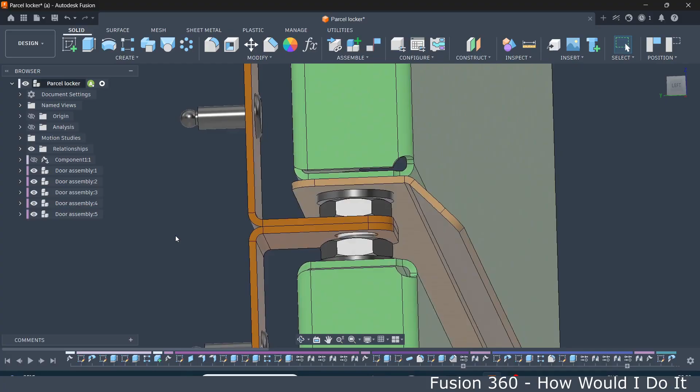In this video, we're going to look at how to quickly and easily insert fasteners into the assembly we created previously.

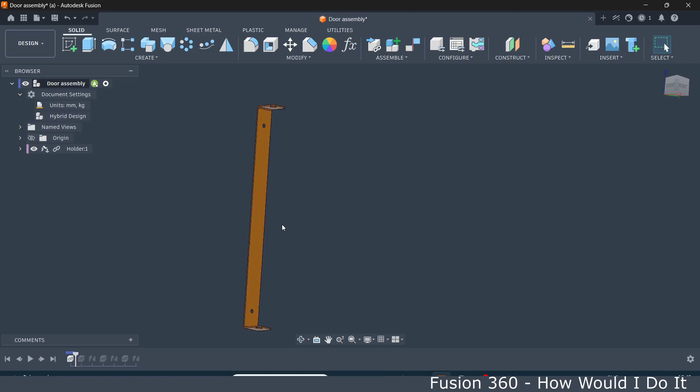Let's roll back the timeline to our first component, the holder, to add the first batch of hardware. We go to Insert, select Insert Fastener, and we'll start with rivets. I'm going to search for DIN 7337 since that's the standard for these rivets. Instead of DIN 7337, we can search only by number.

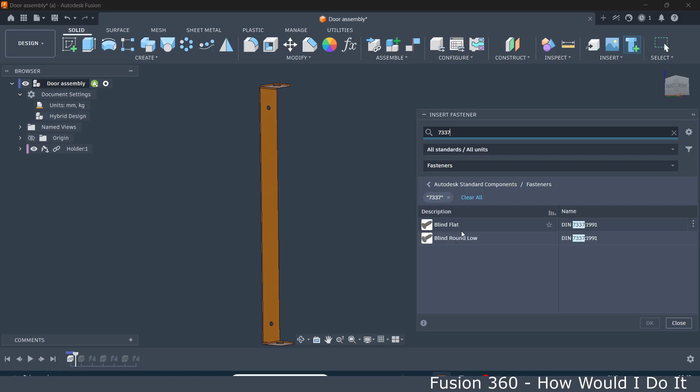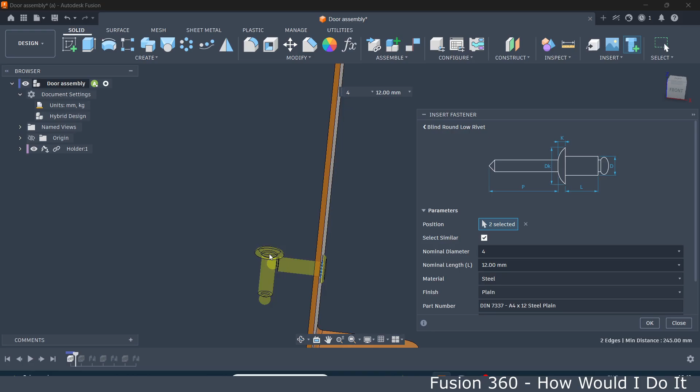We can type 7337. Now I know the hole diameter is 5 millimeters, so I'll select a 4 millimeter rivet. The length is already suggested, but I'll change it to 12 millimeters. As you can see, Fusion automatically populates both holes, which drastically speeds up the process, especially if you have more holes. Next, let's add some hex socket set screws.

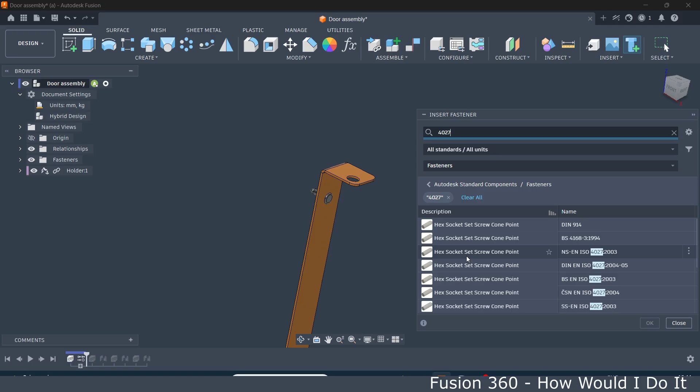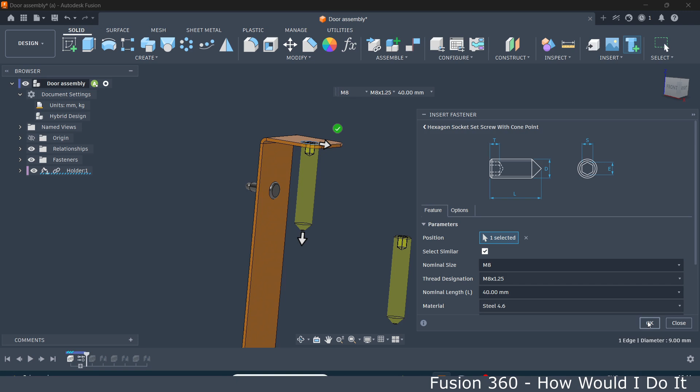Go to Insert, Insert Fastener, search for 4027 standard, and we will select M8. Once we pick the corresponding hole, it defaults to a 40 millimeter length, which works perfectly for us. We just need to tweak the position slightly. Let's move it upwards, and now it looks exactly right. Now we will add some thin hex nuts.

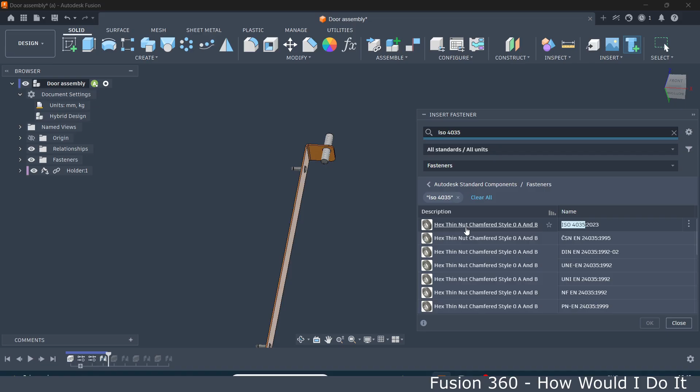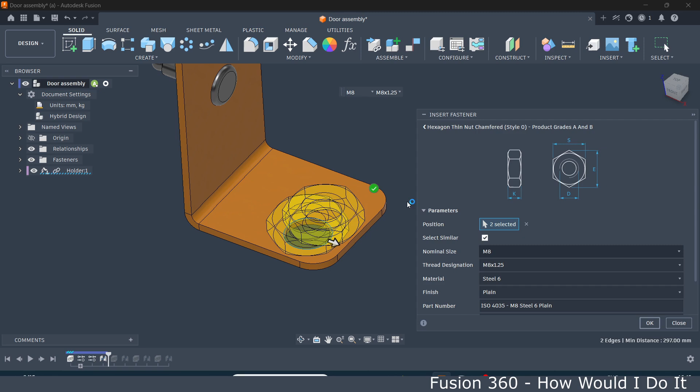4035. We are using thin nuts specifically to save space, as clearance is quite tight here. We'll select M8, place them in these two spots and hit OK. This might not look like it makes a ton of sense right now, but it will all click later in the project. And you'll see exactly why we are setting it up this way.

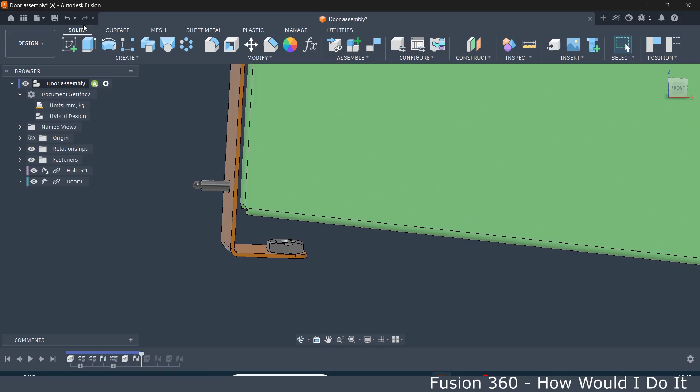Moving further down the timeline, I noticed that the door isn't positioned correctly. Let's fix that. I'll double click this joint and move it downwards by 5 millimeters. This looks better.

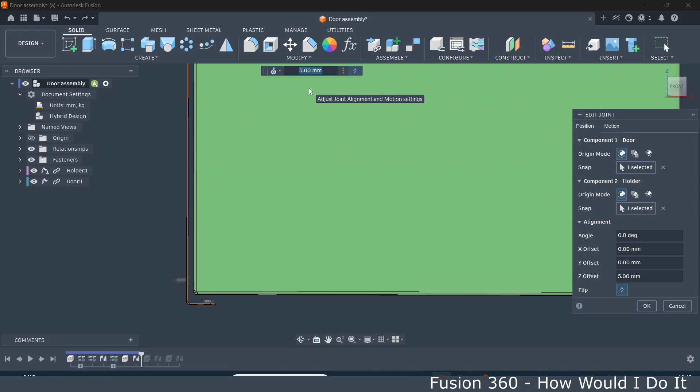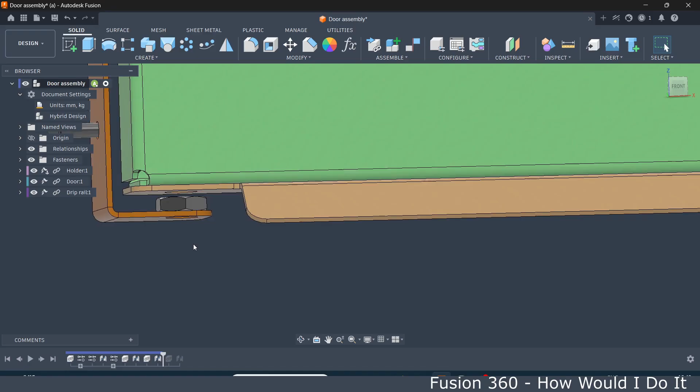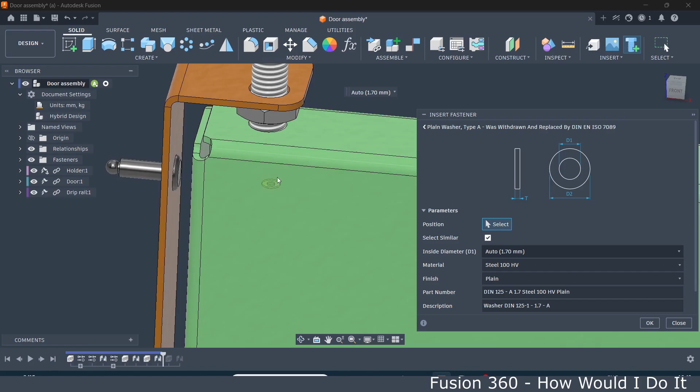Advancing the timeline again brings us to the drip rail. Let's add some washers here. Go to Insert, Insert Fastener, search for 125. Select the hole. Fusion automatically suggests the right washer size based on the hole diameter. We'll place them in these two positions, and here is how it looks.

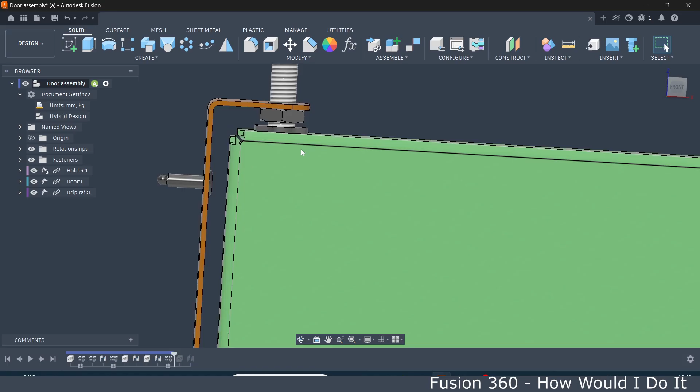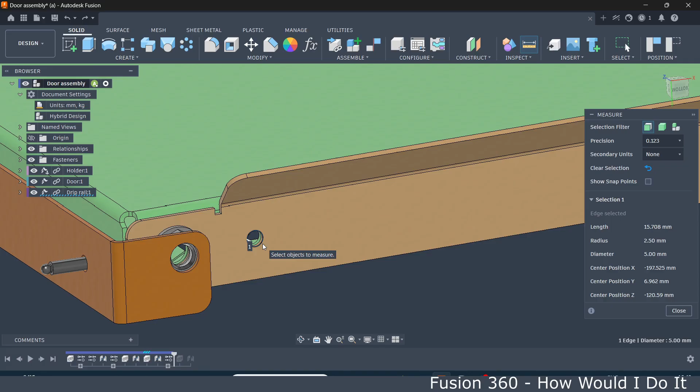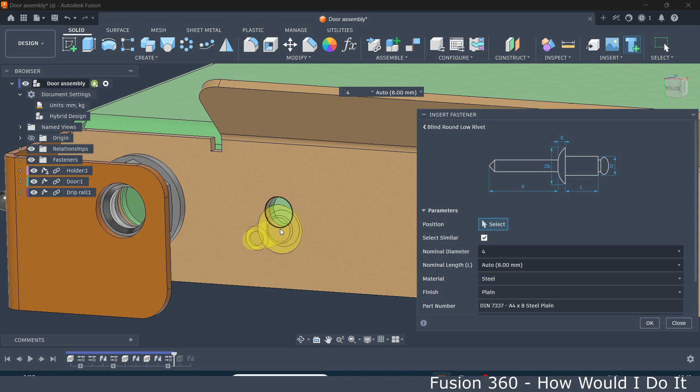Now we need the rivets to connect the drip rail to the door. Let's double check the hole diameter first. It's 5 millimeters. Go to Insert, Insert Fastener, type in 7337, select the rivet, and you'll see that Fusion instantly populates all 3 holes. Hit OK. And let's quickly save the file.

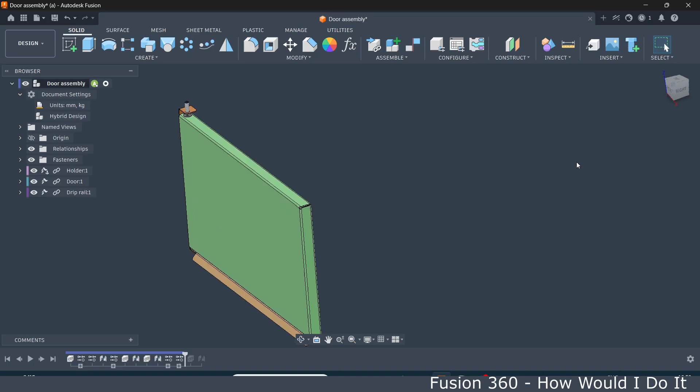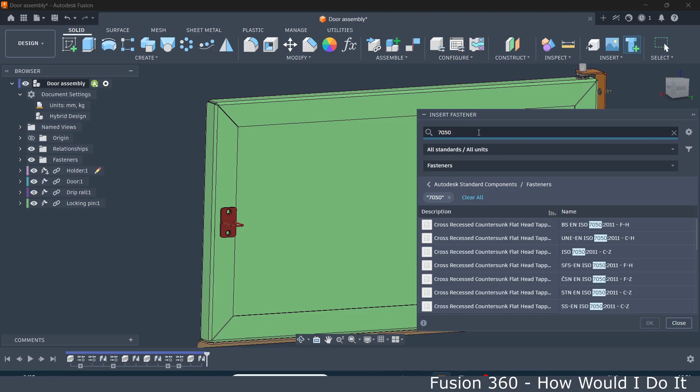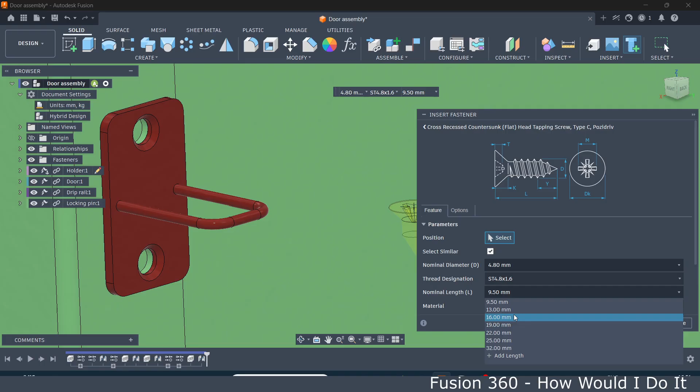Finally, let's jump to the end of the timeline where we have the locking pin. We need to secure the locking pin to the door using self-tapping screws. We go to Insert Fastener, type in 7050, choose the right diameter, and a length, and place it. Fusion automatically inserts both screws.

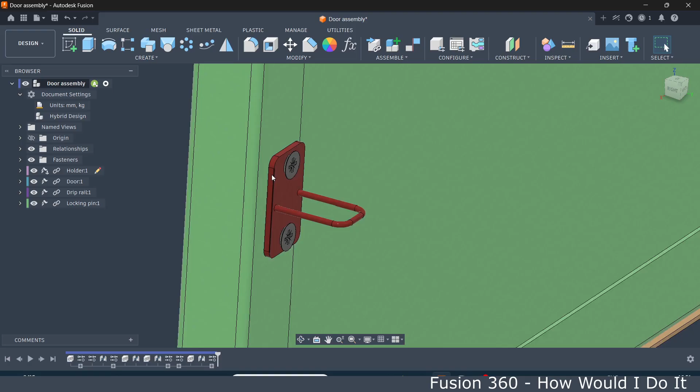And there we go. All the fasteners are now in place. As you can see, using Fusion's built-in fastener library makes it simple and efficient to populate your assemblies.